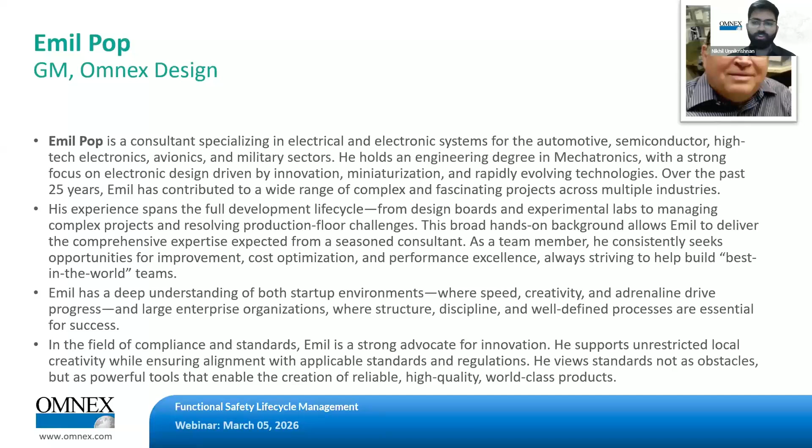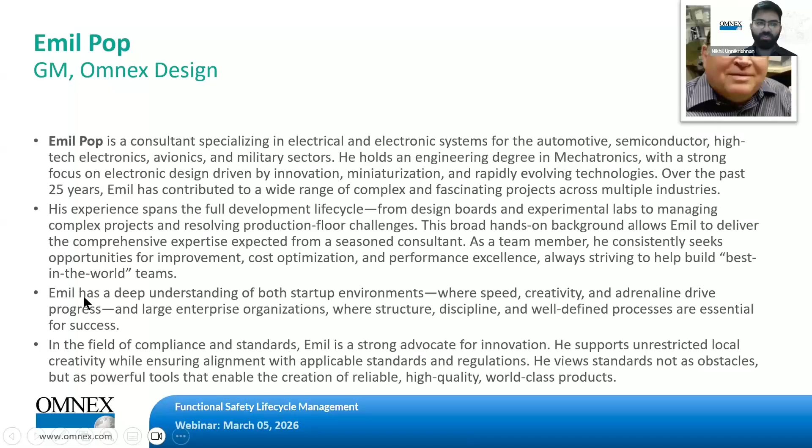Andrew, thank you for that warm introduction. I'm happy to join my colleague here, Emil Pop, in being part of this webinar. Hopefully, during the next 30 minutes, we are able to discuss with you some interesting topics that we have in store for you. Just to make sure we are all on the same page, this is the abstract of the webinar.

We have promised you for the next 30 minutes, and we will discuss the safety life cycle as it extends through the entire operation within an OEM or automotive program. So what are the things we should be considering, all the way from concept to launch and then post-production thereafter. This is the abstract, you have it on your invite.

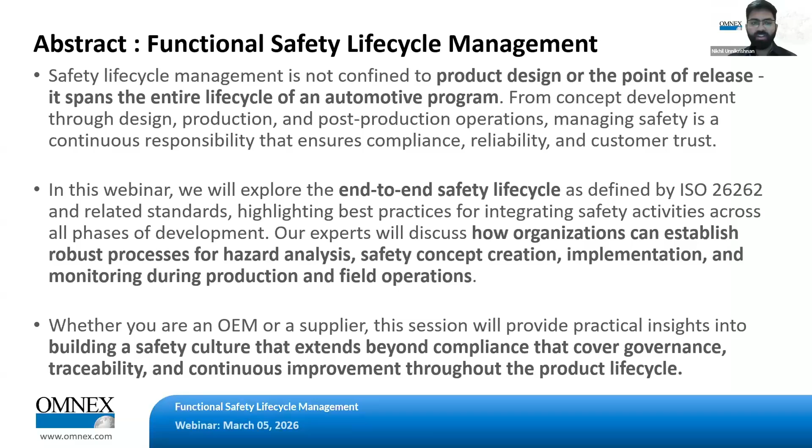The first thing we'll get into is just talk a couple of minutes about Omnex. Some of you are joining us for the very first time, so I just wanted to let you know what we do. Omnex is headquartered in Ann Arbor, Michigan, and we operate in North America, Europe, and Asia with over 16 offices worldwide. We have over 40 years in organizational experience, and a lot of our senior subject matter experts are on the writing committees of various standards.

For example, ISO 26262, we have our colleagues that are right now representing the US tag in part 6 and also part 2. We're also contributing members for the second edition that's currently active, and even the previous version before that. We also have contributions in ISO SAE 21434, product cybersecurity, and SOTIF standards, just to name a few among the multiple.

So a quick look at our global footprint and where we have the offices I just mentioned. And these are our 8 areas of focus. Today's webinar is focusing on our e-mobility space that's dealing with functional safety, and we will get more into it as we go through the webinar.

To start things off, I wanted to bring up a poll question so that we know, since we see a lot of names on the participant list here, where you're coming from and what your maturity and journey is in functional safety. Please go ahead and load the poll up, Andrew. Where are you in your functional safety journey? Are you new to functional safety, here to learn? Maybe you're part of one functional safety project, trying to scale it to additional projects. Or number 3, maybe you have multiple functional safety projects already performed, and you're trying to standardize approaches within the organization. Please go ahead and vote your preference, and then we can go from there.

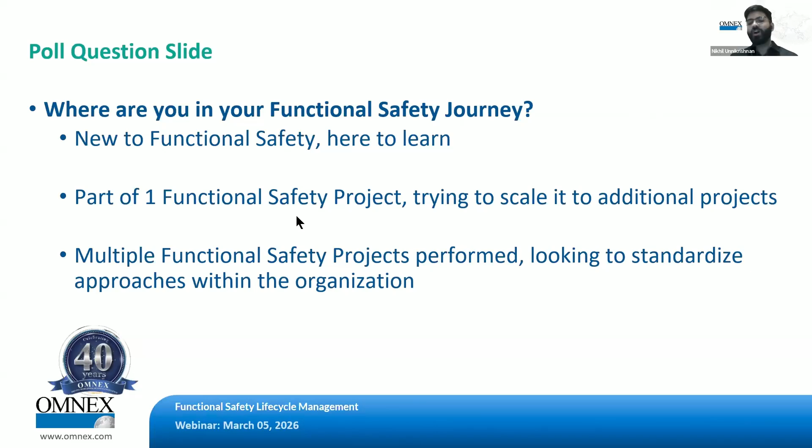Okay, so the majority of you seem to be new to functional safety and here to learn, and some of you have been part of at least one functional safety project and are trying to scale it to additional projects. So this is going to be interesting, I think we have the right mix here. Emil, I look forward to your thoughts when you discuss the material. Hopefully we can add value to the participants here. And without further ado, I want to pass the mic over to Emil, who's going to do the majority of the talking.

As defined in the standard, what do we know about ISO 26262? It is a functional safety standard that provides an automotive safety life cycle. That means from beginning to end: management, developing, production, operation, service, decommissioning, and it supports all the activities during these life cycle phases.

It has automotive specific focus. There are other safety standards around, and they're quite specific to certain industries, but for us, for automotive, we have this automotive-specific standard. We talk a lot about ASILs, and that allows us to quantify it.

In all fairness, it is a design-heavy standard that tends to focus more on the safety of the design. It offers a lot of tools and is quite detailed in what you do about design, but it's very scarce on what happens after the design.

Pretty much what I have highlighted there - production, operation, and decommissioning - it is mentioned there, you can see it on the right-hand side a little bit in part 7, but it's not detailed. If you look at the life cycle, design takes maybe 2 years, but the whole production, operation, service, decommissioning might take 15 years, maybe even 20 years. So funny enough, the standard is very strong and focused on the first part, but not so on the second.

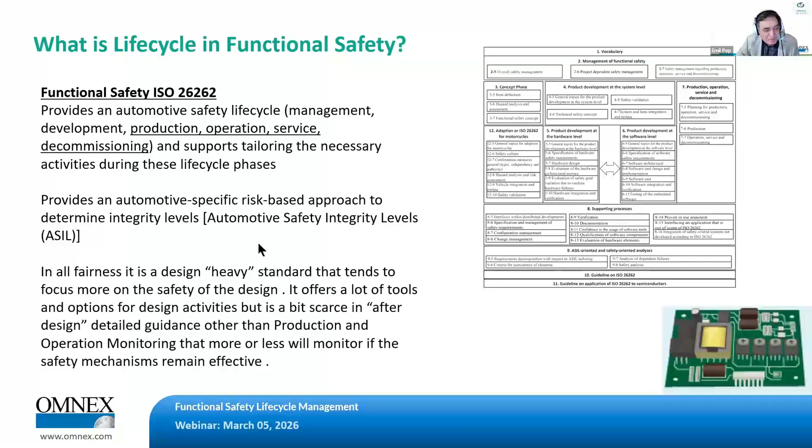So, as I said, what are the life cycle challenges in ISO 26262? It is a heavy process with a lot of documentation, right? It's very structured, very document-driven, slows development, increases costs, and reduces flexibility, especially for agile and fast iteration environments.

Even software releases - you might have a bug fix for a software release that takes 2 days, but the paperwork and completing all the documentation for that release might take a week or two weeks. So usually that's the cause: you try to fix a bug, and then you need 2 weeks of approval and document vetting and everything else.

So it provides limited guidance for agile and DevOps integration, right? It's designed around the traditional V model, and it's lacking adaptation to the modern tools. It is focused on functional safety only, so this ISO 26262 is not taking care of other things.

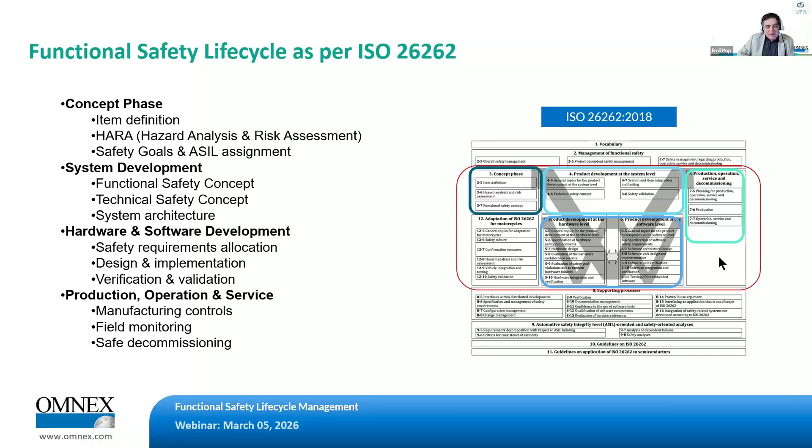It's a very convoluted supply chain, and life cycle management has a few key principles you have to respect: the ASIL, independence and confirmation measures, systematic verification and validation, correct documentation, and supplier integration, the famous DIA, has to be consistent throughout, regardless of the fan-out of the product.

These things have to be observed. Why? Because you want an expected outcome - you want hazards identified, risks controlled, safety mechanisms verified regardless of what it is, and you need continuous monitoring. Think of a McDonald's - you want the hamburger to taste the same at the end of the day, regardless of where it's coming from.

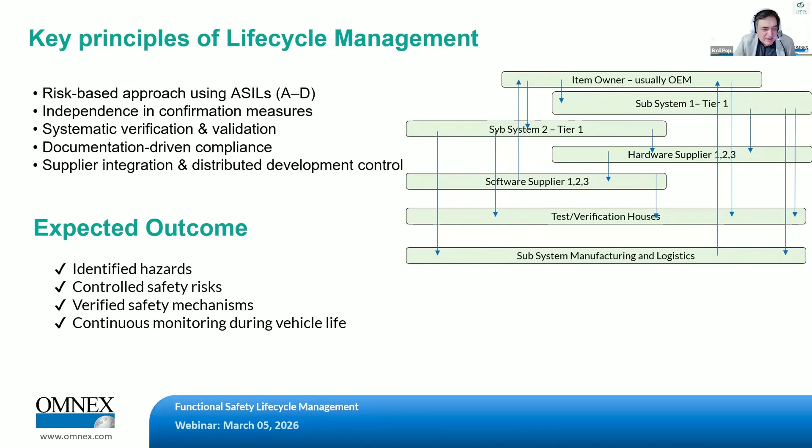So this is the situation. Okay, let's move on - it gets more fun from here on. Now the challenge is how we integrate safety across all these phases.

In the early phase, these phases - concept - we have tools, the standard gives us the tools: item definition, hazard analysis, safety goal analysis, functional safety concept. We have tables, research, examples, many things we can deal with. Definitely safety is defined before the thing starts.

It's the pyramid idea - this concept happens somewhere at the top level. Then we move to system development, which can be OEM or even tier 1 - a tier 1 can be very, very good. You start with the technical safety requirements, system architecture. We can start defining safety mechanisms, safety analysis. The standard gives you a lot of tools, a lot of examples, and it's a well-documented process.

So the safety requirements flow down into architecture - we're kind of set there, we know what we're doing. Then it becomes fluffier and fluffier. We have hardware and software development, now we have to allocate this. We have detailed design, we have unit integration.

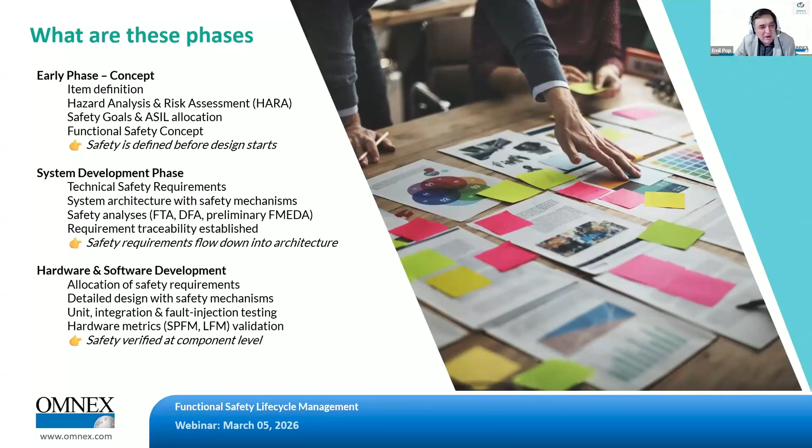Now we have cross-phase safety activities: functional safety management, configuration and change management, traceability. So we kind of monitor the safety there - we do assessments, we do things, and we are still in the design stage.

We kind of move, even with verification and validation, we get a little bit practical. We have product, we test requirements, we test everything, and we kind of end the V model here.

And after that, obviously, we have the post-development phases, which is one of the most challenging parts, and I'll elaborate a little bit later in the next slides.

It goes out for production. And here we can talk about production safety controls, field monitoring, incident analysis, controlled updates, software OTA - it's very popular these days - and decommissioning. So definitely look at that note: safety responsibility continues after SOP. That's a big challenge.

With that thing in mind, let's move forward to the next slides, and I'll start talking more and more about backend safety. It's very interesting - in modern connected vehicles, safety is no longer limited to the vehicle ECUs. Backend systems, like cloud servers, OTA platforms, data pipelines, service updates, directly influence the vehicle behavior and update it, making backend safety critical.

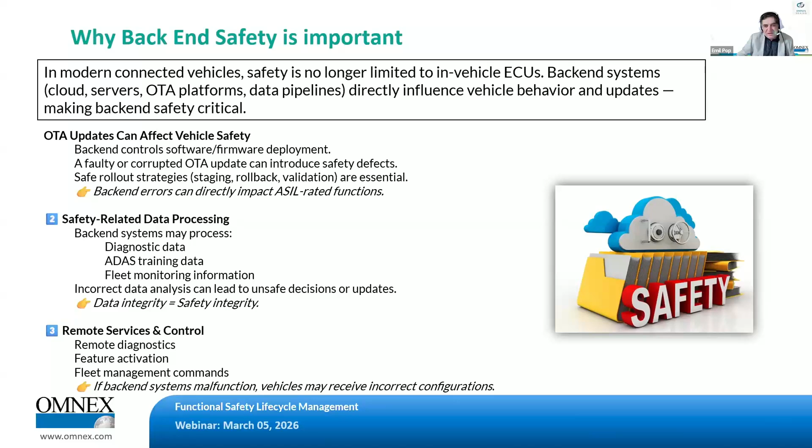Remote services and control, again, very popular. They are coming. Remote diagnostics, feature activation, fleet management. If backend systems malfunction, vehicles receive incorrect configurations. Let's go to the next. There are a few more, right?

Monitoring and field incident detection. And then again, detection of safety-related faults in the field, early warning of systematic failures, triggering corrective actions. What do you do? Who does it? Who takes responsibility for it? And it's very simple to explain it here and to show. But think of one of these situations.

Okay, there is a thing with an inverter or some kind of motor or battery management. Who takes responsibility for it? The OEM takes responsibility because obviously it's done through the OEM, the tier one who did it, the people who did the electronics. Who pays for it, who's responsible, who has to vet it. And it is very complicated. It's not as simple as it looks.

Cybersecurity and safety interact all the time. And there are two verticals. They try to be the same, like brothers and sisters, but like brothers and sisters they sometimes agree and sometimes they don't. So I had situations where there was a safety problem and safety was saying, well, that's cyber. If they change that memory location, someone hacked into it. And cyber was saying, no, it's safety, because you didn't duplicate and you didn't protect that memory location. So it is a bit of a cat and dog situation there.

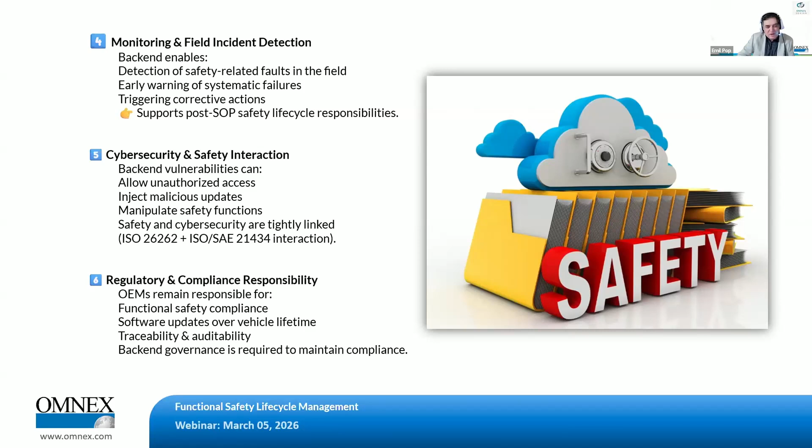And then we have regulatory and compliance responsibility. The OEM remains responsible for functional safety compliance, software updates, traceability, but also the OEM is a big gorilla and can impose a lot of pressure on tier ones and tier twos. So usually that's the situation in the field as we run the product.

Design, as I said, takes 2 years, and then operation, service and decommissioning take another 15 years, and you'll have to support 15 years of that. And the problem is having that infrastructure in place to support that, because as a product gets designed and moves to production, the machinery is getting old, and production gets busy maintaining quality. The item can break, but nobody will forgive you a safety failure for that. So after 15 years, yeah, an ECU can break, an airbag box can break, but nobody will forgive you if the airbag blows up for no reason.

So let's move to the next step, and that's building a safety culture beyond compliance, right? Because most companies have a very focused view: let's pass the audit, let's get the thing in, let's get the PPAP done, and we are done. Well, bad news. You're not done. Building a safety culture is not easy. So at least you hear it from me. If you say it to your own colleagues and management in your organization: yes, it's not easy, and it takes a lot of time and commitment at all levels, right?

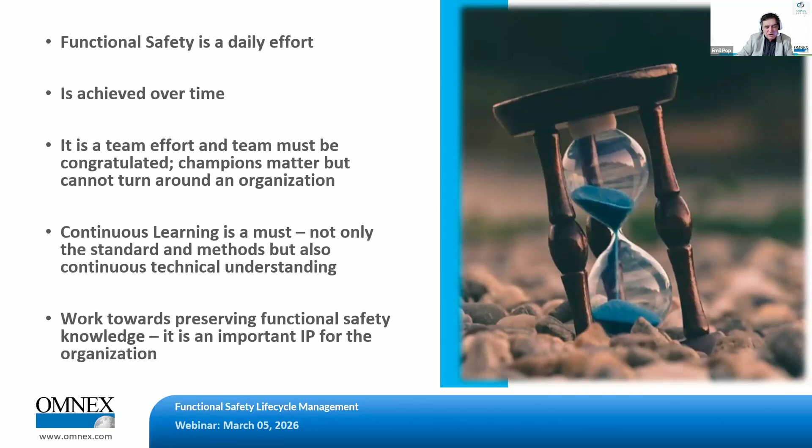Okay, let's go. We have more. Just a few things in the summary, and we are done. So again, keep in mind, life cycle does not mean only the design phase. It is design heavy. You're gonna achieve something, but it takes a longer time than that to implement ISO 26262 or to be compliant with ISO 26262. As I say, the hard part seems to be production, operation, decommissioning, just for the sheer length of time that production, operation, decommissioning happens.

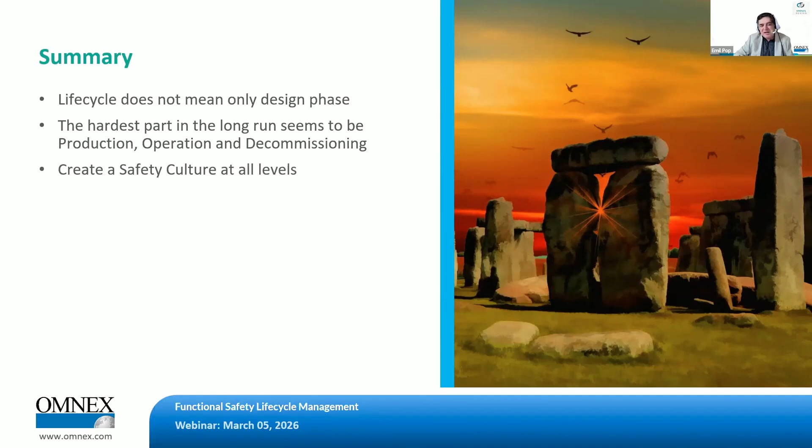And tier ones are suffering, I would say, the most, because they are between OEMs and tier twos. They have design, but they have plants all over the world, and products tend to start in a high cost country, then move to a low cost country. And a lot of these safety activities kind of disappear, due to language changes, plant changes, staff changes. So it is very hard to keep it at production, operation and decommissioning. And actually, there is not too much experience. The modern safety products came up in the last 8 years, so if you consider design is 2-3 years, it's only manufacturing for a few years.

Create a safety culture at all levels, improve cross-team collaboration, especially design with manufacturing. There seems to be a big fence between design and manufacturing. Design finishes, gets approved, they put it on a production server and they don't care about it. Manufacturing takes it and they don't fully understand the extent of functional safety. As I said, protect and preserve functional safety IP. It's knowledge.

Teams change, and they change a lot even during design. You bring the star designers, they start up with architecture, and they are gone from the project. Some of the safety IP is gone, and not everybody understands what they had in mind. If documentation is not done properly and it's not protected, it's not noted. So it is a challenge there. Nevertheless, let's say 10 years down the road, if you have to go back, it becomes a big

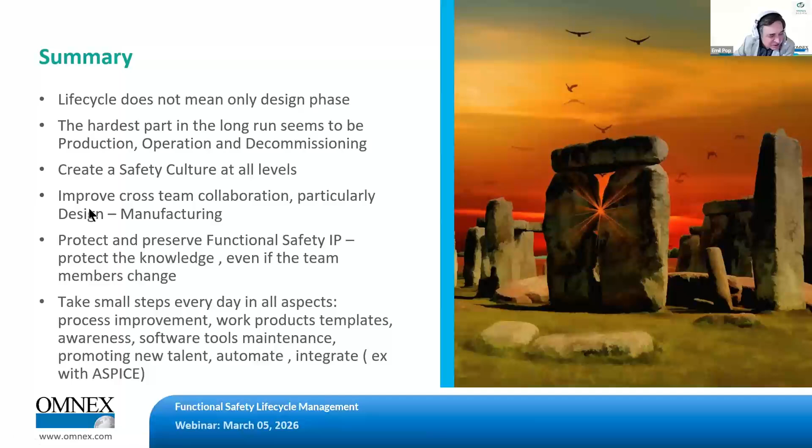So again, it's not easy. I wish you luck, but there are challenges. Definitely, there are challenges. And with this, I'll let Nikhil say a few words for the completion of the webinar, and then we'll go from there. I just want to cover a quick couple of slides, and then we have a few questions from the audience that I'll bring to you, Emil.